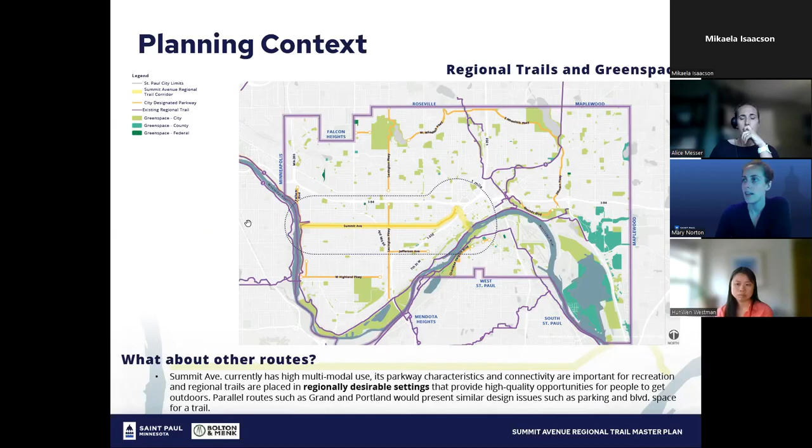Some project details and background. Again, an important link—we're focusing some of our planning on the Lexington to Victoria section. There's interest there, as it's planned for reconstruction in 2023 through the Public Works Capital Program. Looking at the whole corridor, there's a real-time build component to the Public Works Capital Improvement Plan for Lexington to Victoria reconstruction. So we're looking at how, if a trail facility is planned, it would inform a built project that's already in the works. There's a lens we're looking through from a timing perspective as we talk through these big ideas.

Project goals, again, are to improve recreation and safety for all users. We're really trying to find a balance between modernizing infrastructure—we know 'Pave the Road' has been loud and clear, and people who live on that roadway know it could use some improvement. Curb cuts and accessibility standards—infrastructure and timing need to be modernized. We want to think to the future about when those opportunities exist, how we can balance that timing and bring more facilities up to provide longer-term use, supporting the evolving needs of users and creating a more people-oriented corridor.

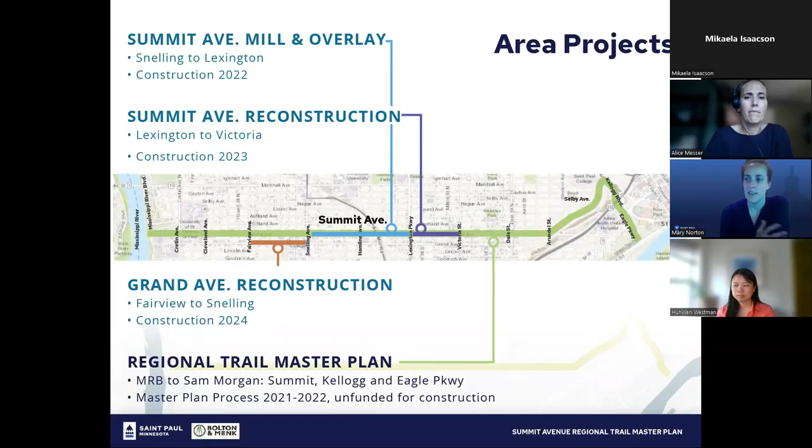The MRB to Sam Morgan Regional Trail Master Plan is unfunded for construction. This is a master plan process—we'll develop a document with recommendations, as I mentioned, that'll be out this summer. That is the planning process itself, but it's unfunded for construction.

Generally speaking, the composition of the corridor breaks down with a defining moment at Lexington. East of Lexington we have a 100-foot right-of-way characterized without any medians. West of Lexington, a 200-foot right-of-way, which is where we see those broad median green spaces.

The median green spaces have two different types. There's one large open median, a 90-foot green space characterization. And then from Wheelock to Saratoga, there's a double median, where it splits and the main traffic runs through the center, characterized by frontage roads on the outsides. So those are the two characterizations within that corridor: 200-foot right of way with median, or no median.

On the eastern leg, you'll see Summit Avenue all the way to Kellogg Boulevard. The leg from Kellogg Boulevard down to the Sam Morgan Regional Trail is also part of this master plan, but we won't focus on the cross section there, since that facility type is already programmed or planned within the Capital City Bikeway planning of the city. That cross section would be identified as part of Capital City Bikeway. Eagle Parkway has an existing footprint or cross section for a multi-use facility.

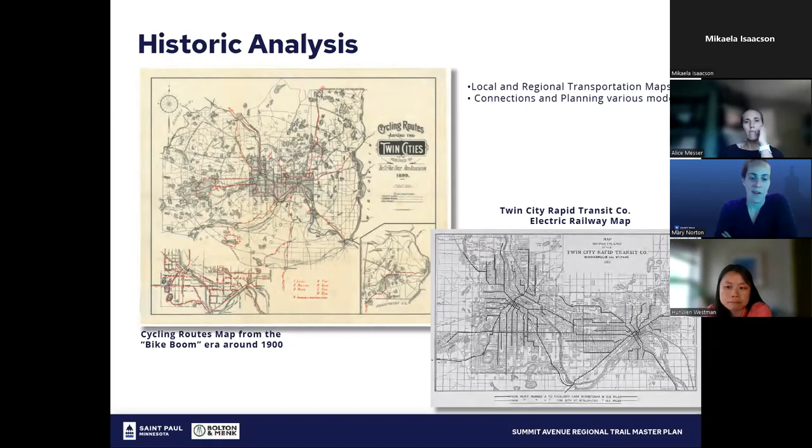Not necessarily even today, tomorrow, but of course, 20, 30 years from now, how people will move about in the city. And so Summit plays a key role in that conversation, thinking about consistencies through time, what sort of has endured and changed.

And then the evolutions of the roadway. So speaking specifically to that wide public right of way as being really important. Those expansive green spaces characterizing the area, even back to the early conception, noting Summit was an excellent parkway and favored those wide green spaces over the segmented parks. So that pattern and rhythm of landscape is really important here.

And we want to come alongside that and complement that, and really focus on the roadway itself as a transportation space, knowing that those aspects have evolved in various ways. The materials themselves have evolved, and walkways and bikeways have as well.

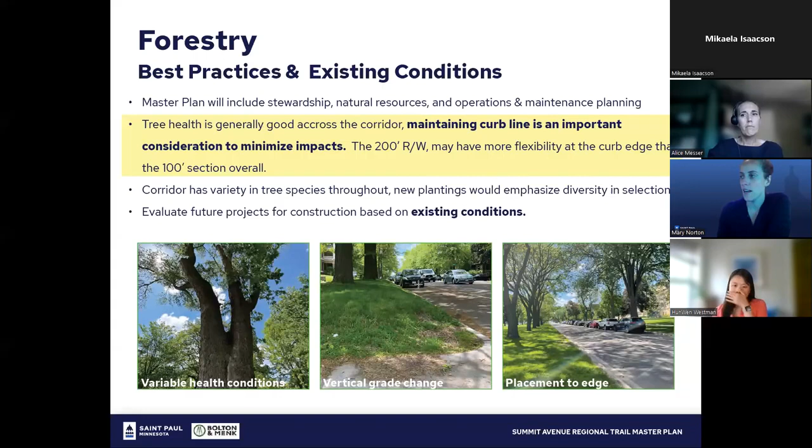I should clarify - the previous study was a corridor-wide study looking from MRB to Kellogg. This particular study was done east of Lexington, in the 100-foot right of way where we're a little more constrained. We wanted to understand if findings would be the same or different. Generally speaking, it was modest, about 30% utilization, but same consistency at Dale for high volume during that particular study.

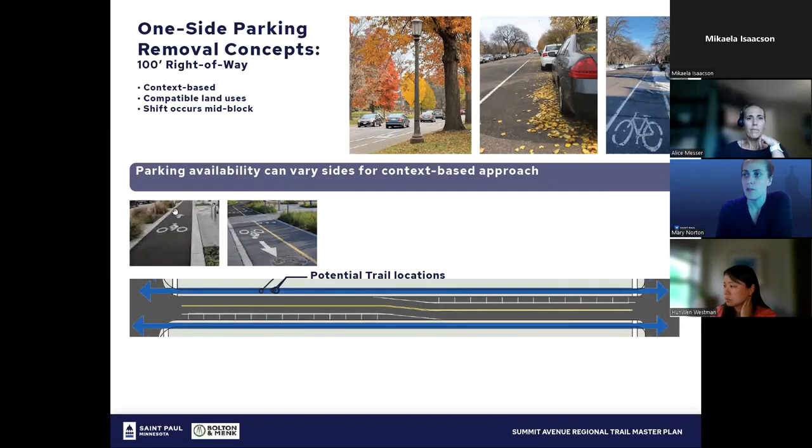You'll see when we get to concepts, we're going to be talking about a one-way style facility or a two-way style facility. These are examples of what that tends to look like. We can talk a little more about that, but something again above the roadway bed, either a two-way bicycle facility or one-way.

When I mentioned the one-way trails or two-way trails, which you see on screen here, this is a little bit about how that could play out. Again, these are above the curb, if you will. A buffer space - all of these concepts reflect having a buffer space, a green sort of area certainly for function and maintenance, but also kind of for a recreational buffer between the treadway and through traffic.

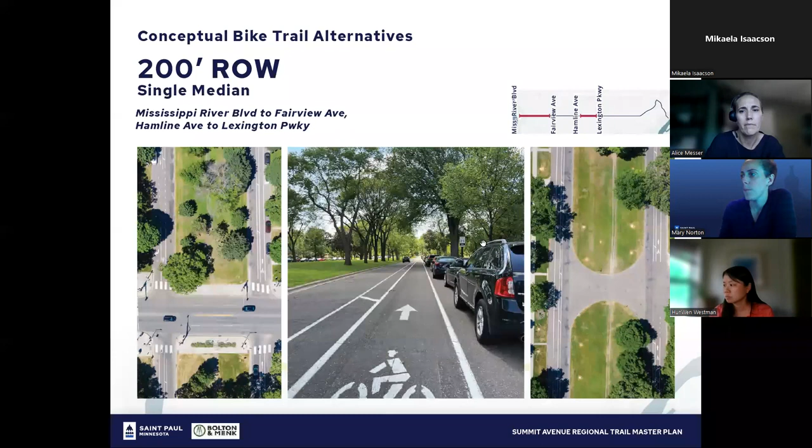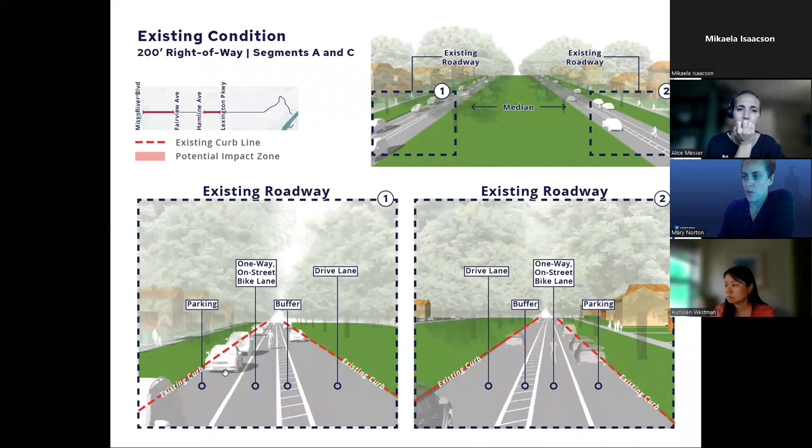And potentially how that could play out in the 200 foot right of way with that central median. This is the existing condition with the on-street bikeway with a buffer to it, playing out between parking and through travel. What you see here is that existing curb edge.

This is an example of that one-way separated trail with parking on both sides. So this keeps parking functionally, but again, elevates that trail facility. We're able to keep impacts pretty minimal here. This is one area where there was a little more wiggle room from that edge condition, from a forestry perspective, by being able to keep parking and accommodate that one-way style facility.

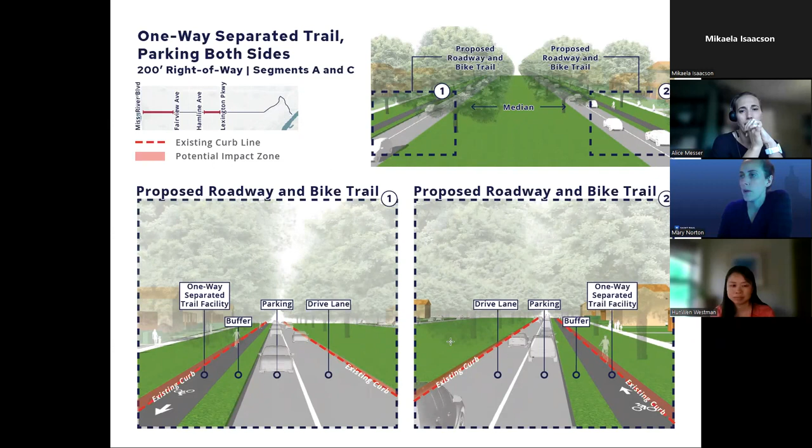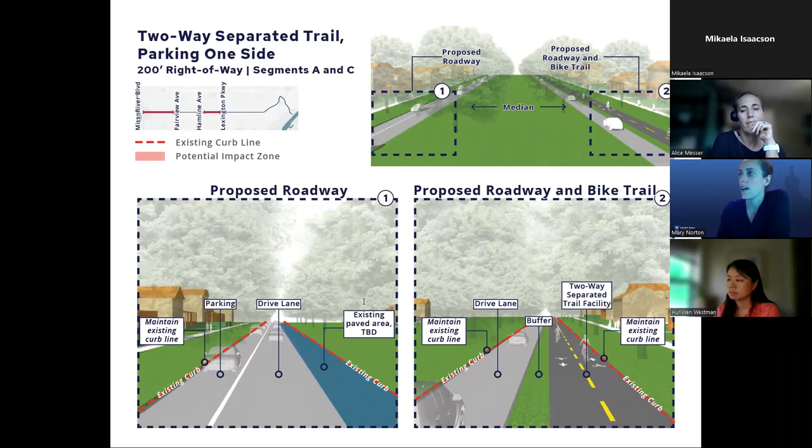When we look at a two-way separated trail, this is where we would need to essentially remove parking on one side in that segment in order to accommodate that two-way style facility. And what you see play out here is that by taking the bikeways off of one side, you end up with additional space essentially. So that could be green space, it could widen that median. But again, a big challenge or push-pull there would be removal of parking on one side in this area in order to create that style facility.

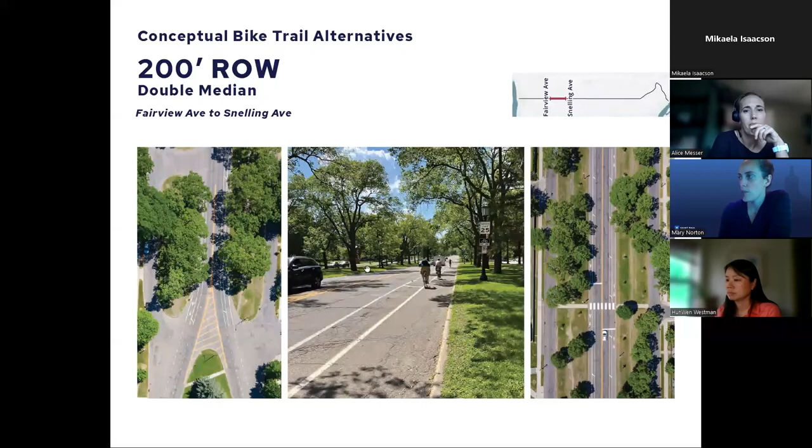In the 200 foot right of way again, so this is the double median. That's the Saratoga stretch, or near Snelling, I should say, Snelling to Wheeler to Saratoga. That is where the through lane comes up through the two medians, existing bikeway here. And the way that this would play out, so parking isn't a factor here necessarily.

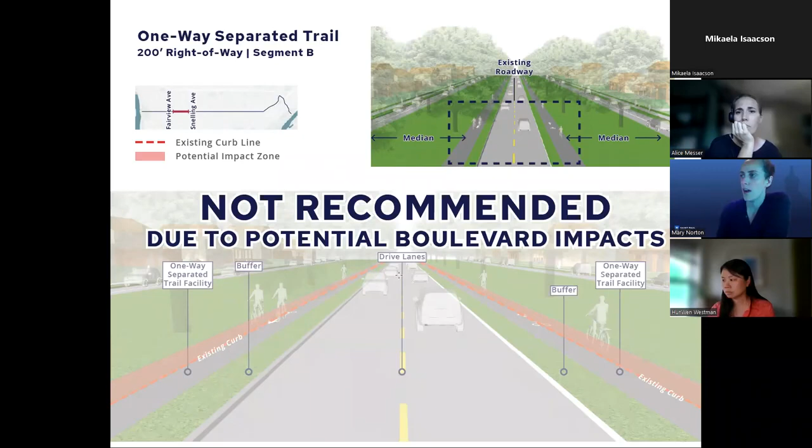What I'm going to go through are essentially ideas that we've looked at, but either are still on the table or would not be recommended just because those boulevard impacts would be too much. So what you see here is that one-way style facility playing out, but not being recommended because of the boulevard impacts that carries. The next one would be a two-way style facility, and this one is able to hold that curb edge. You're essentially taking that through travel and consolidating those bikeways and moving them to one side for a two-way facility.

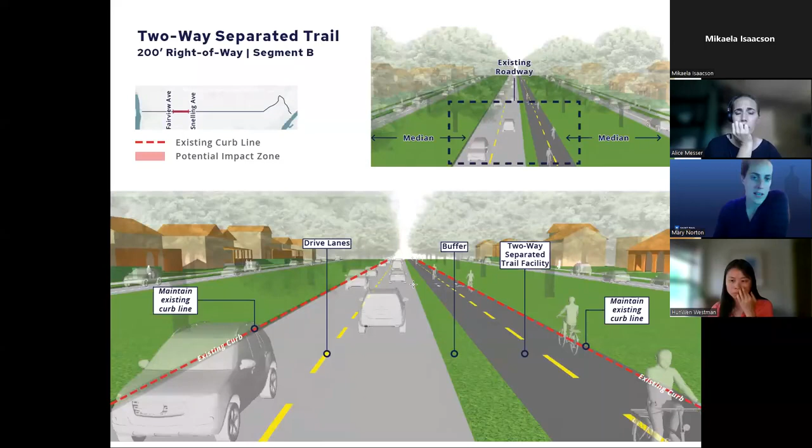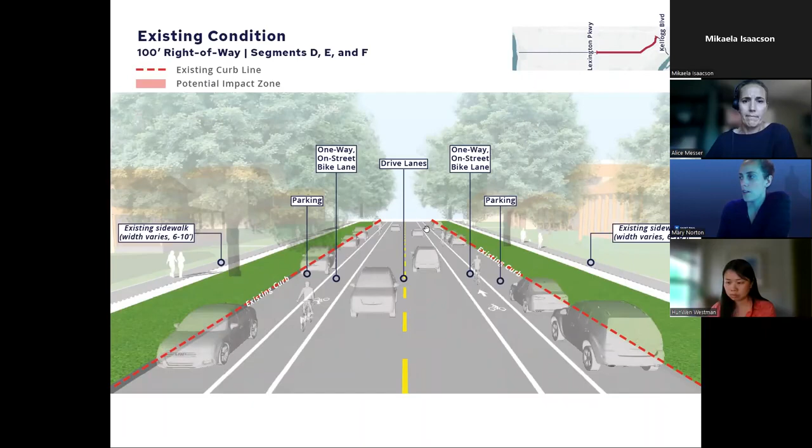In the 100 foot right of way, so now we're east of Lexington, where we don't have a median. The conceptual alternatives here essentially look at, again, we'll do the same thing. I'll go through existing conditions and then what is recommended or would not potentially be recommended because of impacts. So what exists on street here, in the previous sections, you saw that there was a buffered space or a wider striped buffered space. We're in that narrower right of way now, so we have the on-street 5 foot bike lanes between parked cars and through lanes.

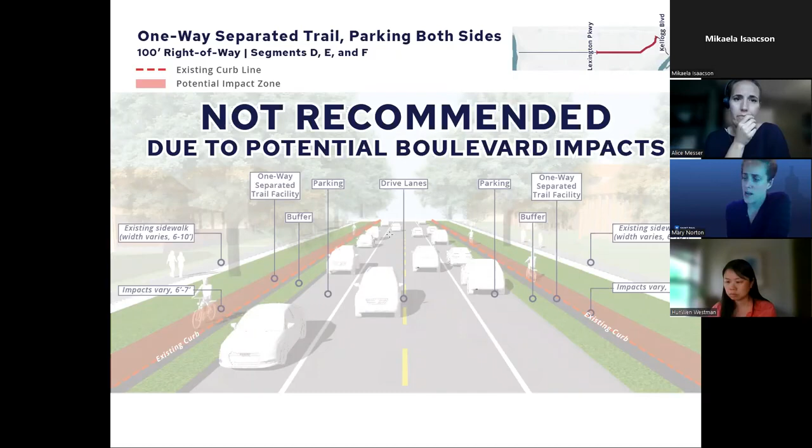The first one we looked at were those one-way style facilities, accommodating that, and the impacts were large enough that we would not recommend that, just because of certainly the mature landscape and the movement of that curb edge. So in order to accommodate that facility and keep parking, that's how that played out.

The second one would be to remove parking on one side or maybe vary it. I think we're still looking at those impacts as just being probably more than would be beneficial in that facility type, really holding that curb edge. So that one is not recommended.

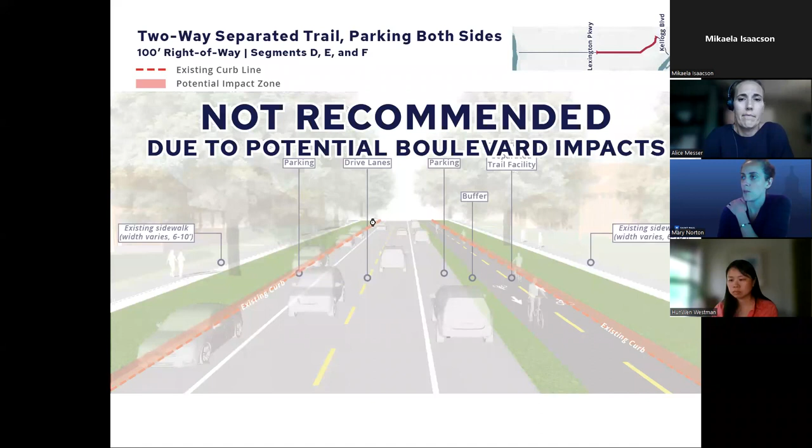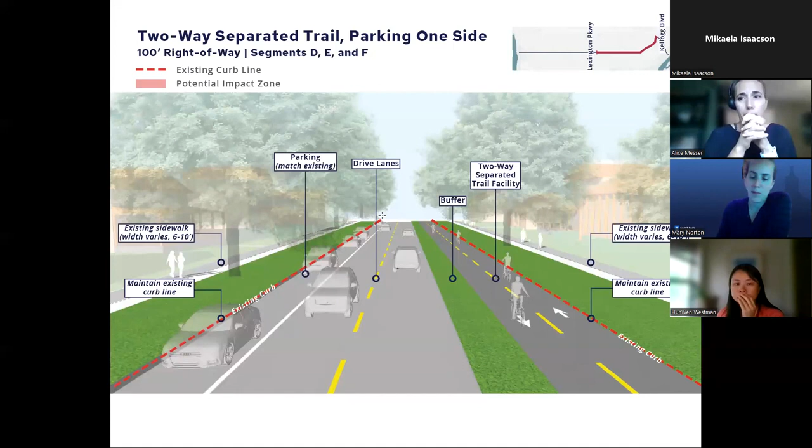And this one here shows a two-way facility, but keeping parking on both sides. Again, we're far enough beyond those curbs that boulevard impact would be too much. But looking at a two-way style facility here with removing parking, or varying parking I should say, but reducing it to one side, in that scenario we're able to hold that existing curb line and really minimize those impacts to those mature landscapes.

So just to recap, what we're going to do next, we're going to have a breakout session. We're going to have some conversation. Everyone will be, we have 6 different rooms that folks can go into, and each facilitator will have some slides to prompt questions and start to hear people's feedback.

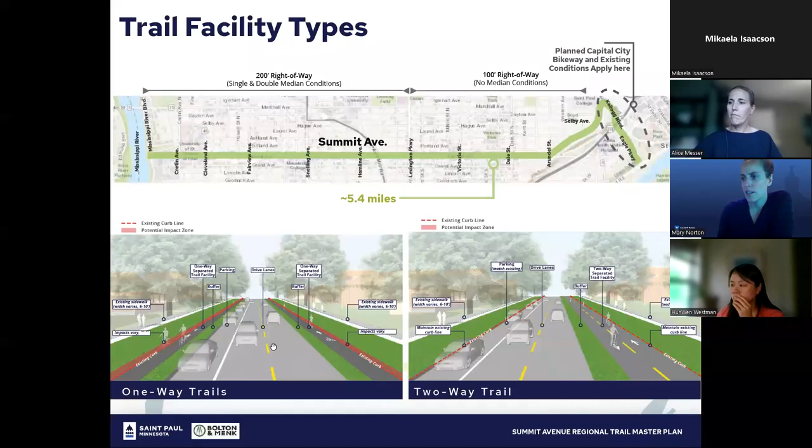The big idea here, things we really want to hear from people are about these styles of facilities. They're two very different ways of moving about the corridor. They each have benefits and drawbacks to them, but we want to hear what people think about how this could shape that public realm and what that looks and feels like, and where people see those priorities. So again, we'll touch on that one-way trail and two-way style trails. And with that, before I jump through, is there anything my other colleagues, Brett, Alice, others want to share based on what we went through? Otherwise, we can get to the discussion, the fun stuff.

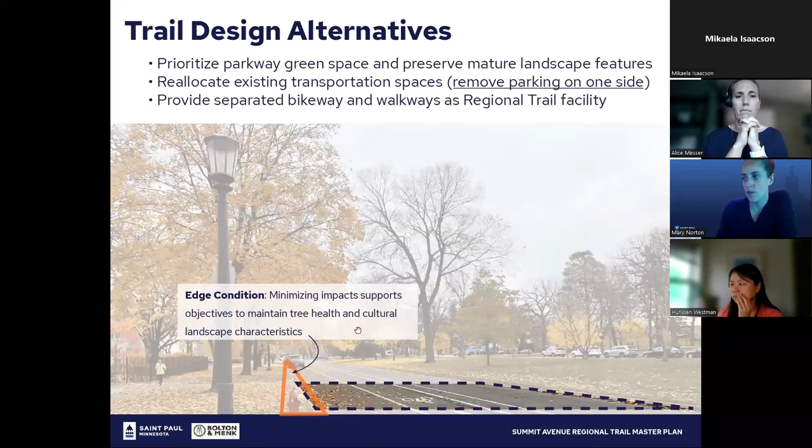Okay, so just going back to those evaluation objectives, keep those in mind as we're talking about big ideas about this trail facility and what we're looking to take away from that, and thinking about that transportation footprint and how that plays out to create space for the trail facility itself.

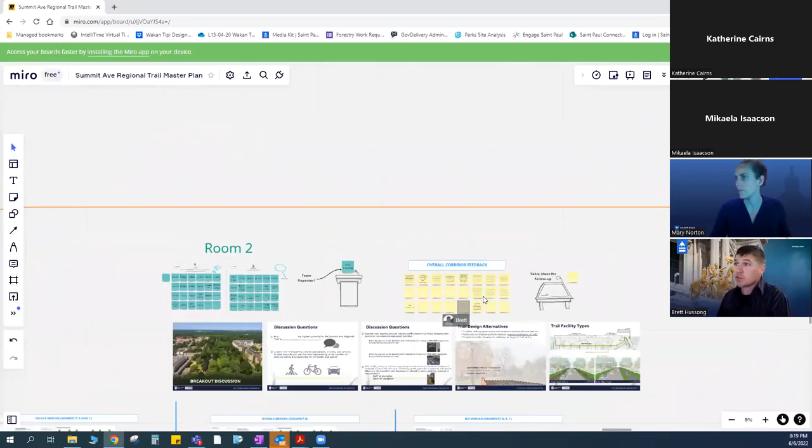And with that, I will turn to group 2. All right, thanks Mary. Our group didn't go through all of the questions, but people wanted to voice their opinion broadly about the trail itself. So there are a couple different sides of it here. Residents thought that the people living there, it should function for them, and since they're taxpayers, there's also plenty of space out there we can't even maintain right now, so adding a trail would be difficult. But there are also other residents who say the space is for everyone, and this is a community space where a lot of people are using it for biking and pedestrians. So there's a little bit of back and forth there.

A lot of people, several people, brought up safety as the number one priority, and that means safety for all users. So they were supportive of grade separated trails. There were also questions about the regional trail itself and whether this is the right placement, questioning the driveways, the intersections, and typically a regional trail would be found in places with less conflicts.

And then finally, people thought—one person said that parking should be the lowest priority and safety should be the highest. We really didn't get into specifically which, one way or two way, was better. And finally, tree preservation was brought up. That was a big topic.

Great, thank you Brett, I appreciate that. I'm going to pan over to group 3. Group 3, ready to share? I'm going to pass it over to Jimmy or Rachel. Sure, yeah. Oh Jimmy, did you have good notes? You did, I took some, and then maybe you can fill in the gaps where I missed. Sure, Rachel. Yep, yeah, a lot of the same stuff.

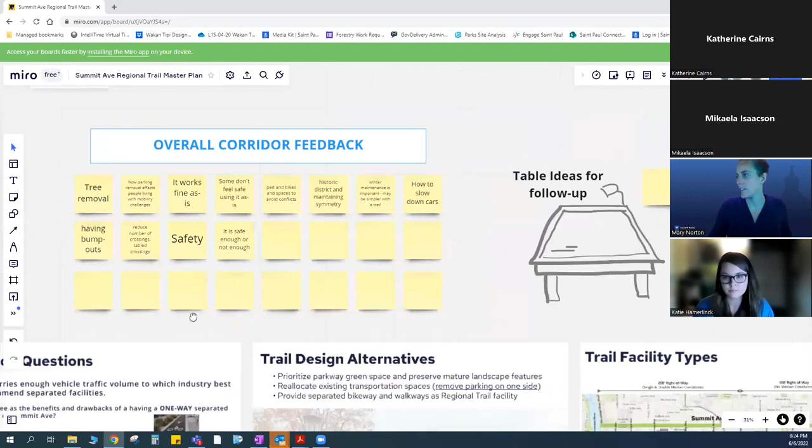Great, thank you so much, group 3. Is group 4 ready? I only have about 6 minutes left, I want to be conscious of folks' time here. Yep, I can jump in and start, and then Liz and Ruben, if you have additional things to add, feel free to jump in. I think our group had a very lively discussion.

We talked, I would say, primarily about project process more so than specific design alternatives, and a lot of conversation about a general desire for more information. That was related both to the determined alignment of a regional trail along Summit, and providing additional information related to safety—so potentially posting the crash data we have available to the Engage St. Paul website so people can see that.

I had one more data point on there.

Another big point of discussion was the number of intersections and driveways and the considerations needed there. If safety is our top priority, what's being considered? There was back and forth on the fact that bikes are crossing those driveways today—we're just doing it in a different manner if we separate that facility—but we should provide more information on how that works.

There was some conversation, plus additional comments in the chat, about maintenance. So I think providing more information about who's responsible for maintenance and what level of maintenance there will be would help.